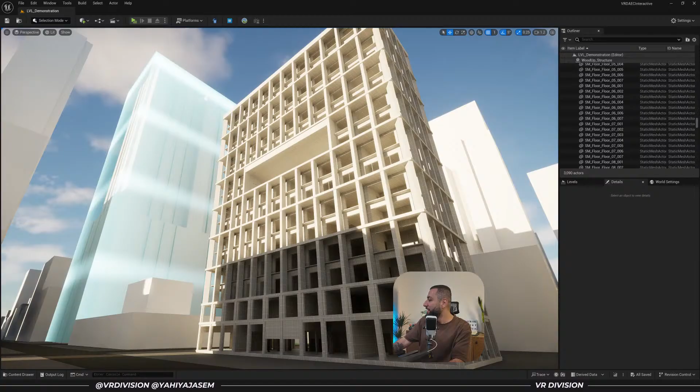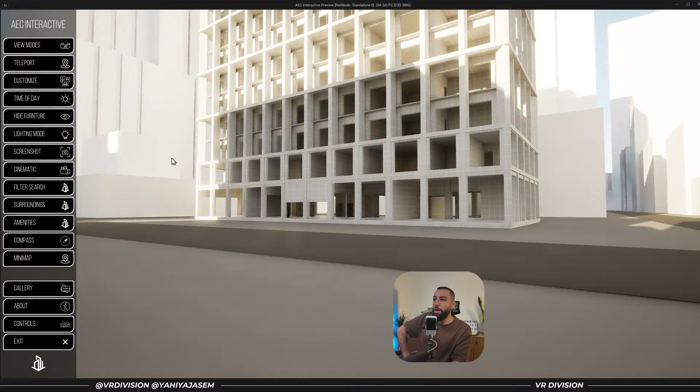Ranto asks, what version are you using? Here I'm using Unreal Engine 5.4. It's the version I started development with, the template that I'm building. I'm keeping things on 5.4 because updating is a simple click up, very easy to the upper versions, but if I develop on 5.5 or 5.6 or whatever, downgrading will be almost impossible. So yeah, I'm using 5.4. I downloaded 5.7, but I still didn't have the chance to check it out. Even 5.6, I've been busy this year focusing on blueprint and the development of my Unreal template. However, I will be making time for Twinmotion, the latest release, and Unreal Engine 5.7. There are some features I'm excited about, and I believe in upcoming streams we're gonna take a look together.

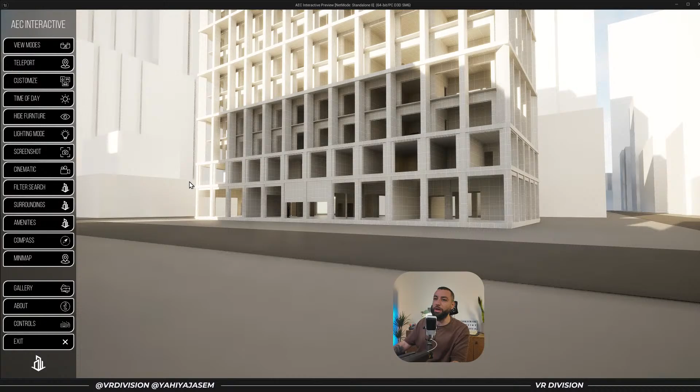I actually wanted to ask you guys, so let me ask this before I forget. Let me first find the Unreal channel. The question I have: would you be interested in live streams together where we watch the best of Unreal Engine, Orlando and Stockholm, or whatever events they are doing? Because they are making some really nice videos and I want to find time to watch some of them. For example, here, 'enhancing digital twins, scriptable tools and design workflows for crowds.' That's a very cool title, and there are some videos like this. So if you're interested, say yes in the chat, and in upcoming live streams we can collect some videos and watch them together and react together, see how it goes.

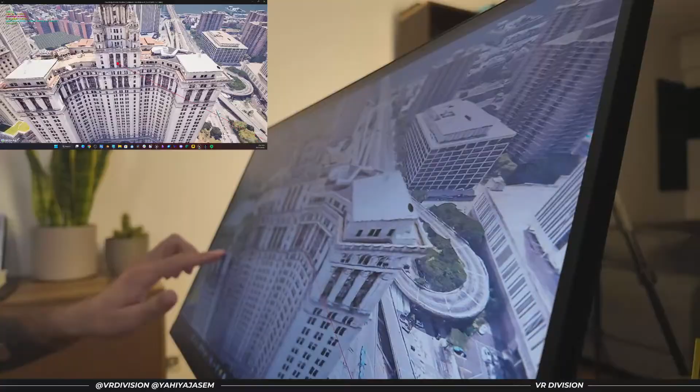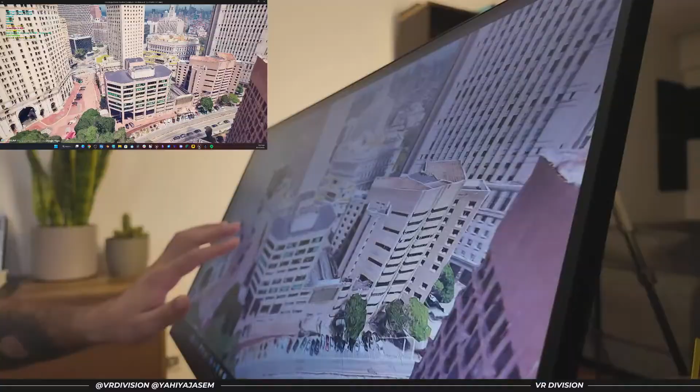So this is for the top-down camera, but I want to improve slightly more on the gesture recognition. Right now it's working fine, but sometimes, maybe 5% of the time or less or more, there are some little bugs I want to improve on or eliminate. I also want to integrate the system in drone mode and first person mode. I'm looking into that, and I'm hoping by the end of this month I will reach some solutions.

This system is work in progress, and it will be added to my Unreal Engine template to explore and interact with architectural projects once it's done. I'm pretty happy with the result. Basically that's what we call progress, a step-by-step process.

Let's say hello to you guys again. And let's do this perhaps.

Now this is one update, one of the parts. Like if you ask, hey, it's been a month, you've been busy, where are you? That's where I was. The second one, I don't know where to count, but there are a lot. So let me show you here.

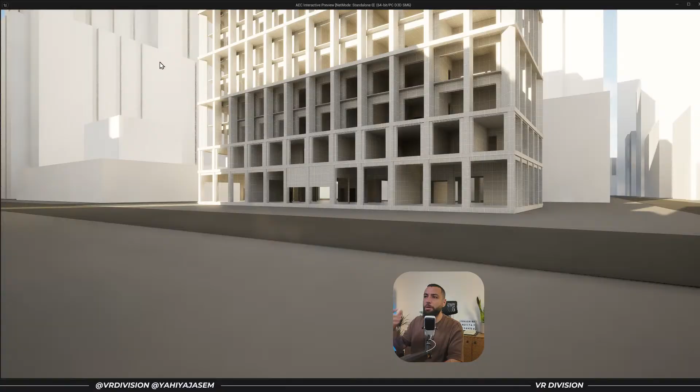If we click on play, I'll recount what I remember from my head. In the past we used to switch between views and it was snappy, but now there is some cool quick animation, as you can see now, like so. That is one of the things I've done, simple but nice for the user experience.

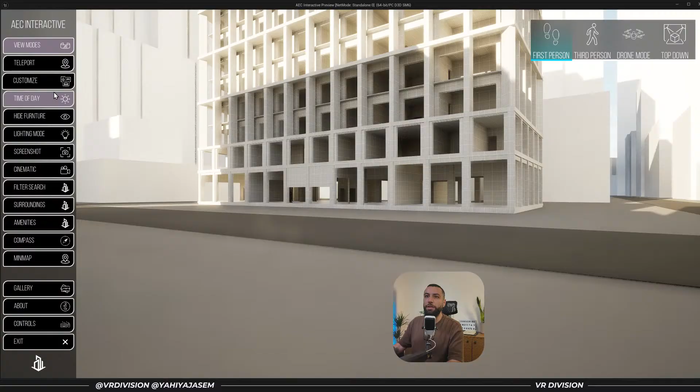Now I also did the following. Most of the work was actually on the systems here. In the past, if you click on filter search, it would eliminate other buttons like surroundings and amenities, blacking them out and disabling them. Now if you click on surroundings and amenities, I made them work together.

Let's say I want to move to surroundings. In the past we used to click and then click again, but now you can simply click. One thing I did: if I click here and then click on filter search, it will rotate the camera to the center of the project.

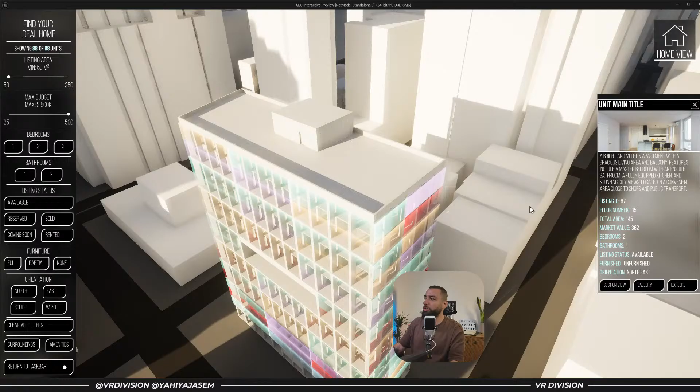This is nearly finished, but of course there is the section view. This is fine, and in addition to the section view, I've added the ability to explore. So now I can explore a unit, any unit I want to explore, like so. Once I'm done exploring, I can click on return, and that will take us back.

I can click here, click on section view, explore, and that will disable section view and allow us to explore. There were too many steps, too many things, but this specifically was requested by one of my students, and I'm happy to say we're done, we're nearly there.

In addition to that, there were different fixes here and there, but now we have smoother camera animation. It just works, and it's going well. So now let me disable this.

One thing I want to do, I think I have this planned for tomorrow. I want, when I click on surroundings, to have a special camera similar to when we click on filter search, which takes us to the center of the project. I want a specific camera that we can specify for surroundings. That's one update I'm working on.

Let's say I always want to be looking from this angle when I click on surroundings. You may have noticed when I click on the unit, let's say I'm going to explore this unit, I can explore it and whatnot. However, when I click on return and disable this mode, I will go back to that unit.

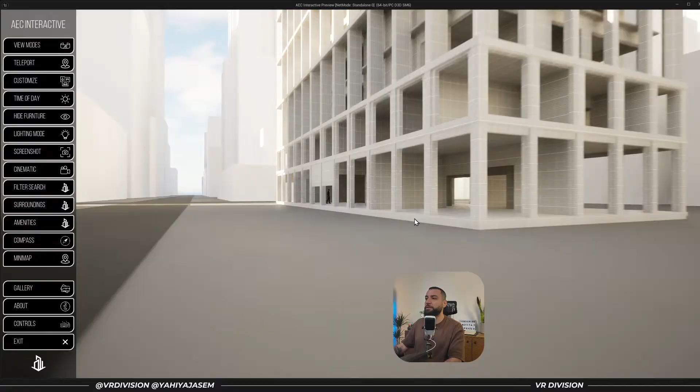So yeah, these are some updates I'm working on. There are very minor bugs, or not bugs, I'd call them user experience improvements that I'd like to fix as well. But we're nearly there. This is now almost one year of work, but it's getting there.

Here also the mini map, you can enable it with the M button. You can zoom in and out, and it will snap to the sides. It's nice, it's fine. You can change time of day, all these things.

So anyway, that's what's up, that's what I'm working on. I have my list of changes and things I'm working on for the versions. I'm using something called ClickUp instead of Trello. I used to use Trello a lot, but now I'm using ClickUp again.

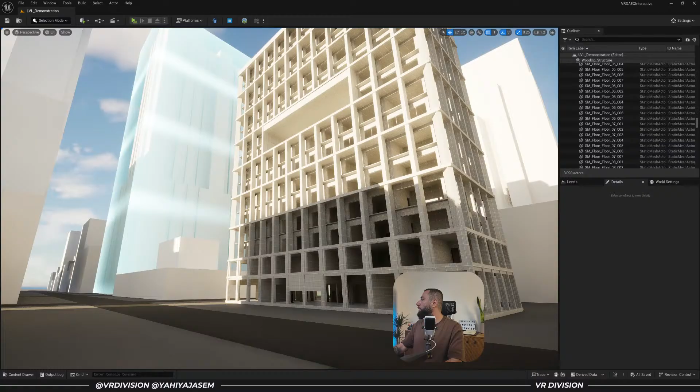And let's read the chat as well. So the poll is 100%. We're definitely going to find some nice videos that we can watch together. And I will announce this before, so we prepare our popcorn and start watching the lessons.

Okay, so Sai, Gravel, Tan, I hope you guys are doing great. Okay, let me read the chat real quick. Let me bring it to this other screen because it's easier, so I can also look at you. Let's do this.

I have a question: do you think architectural visualization has a future in the AI advancing time? Sai, I believe of course it has a future. Now, if we're talking about purely visualizing architecture, where we just create images and videos, it's going to get extremely competitive, and its future, from my perspective, is uncertain.

The architectural visualization field, as we've known it for the past 20 years, where you have a nice 2D CAD plan or BIM data and you want to create visualizations...

Slowly but surely this is somehow disappearing, and we will see, there are still the downsides of AI.

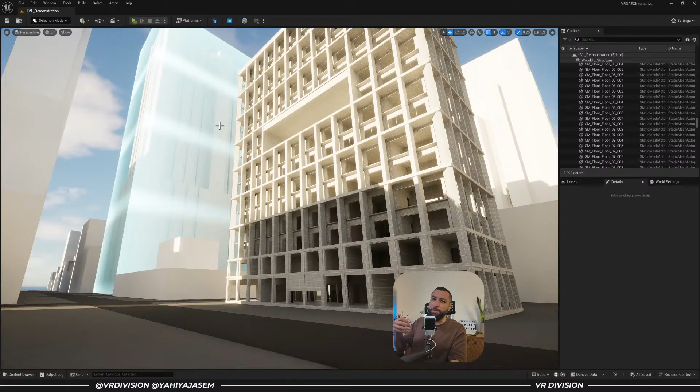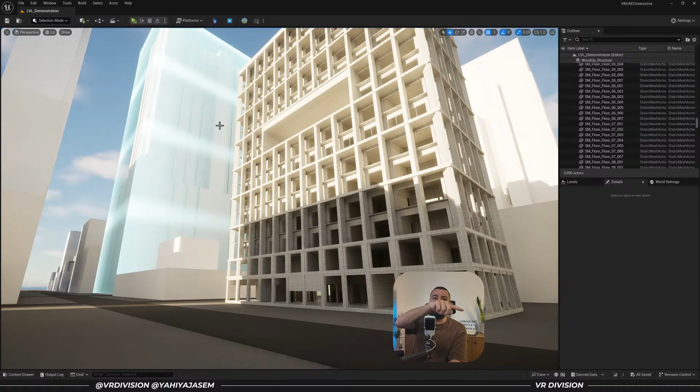Accuracy, consistency, and getting the same results is still not there, but also is still improving. However, I would not bet my future on just architectural visualization. For the past year, I've been focusing my studio on Blueprint and on digital twins, and on integration of Internet of Things, really doubling down on creating interactive experiences.

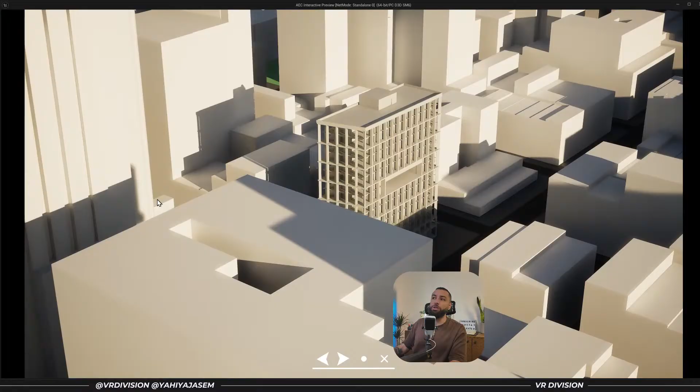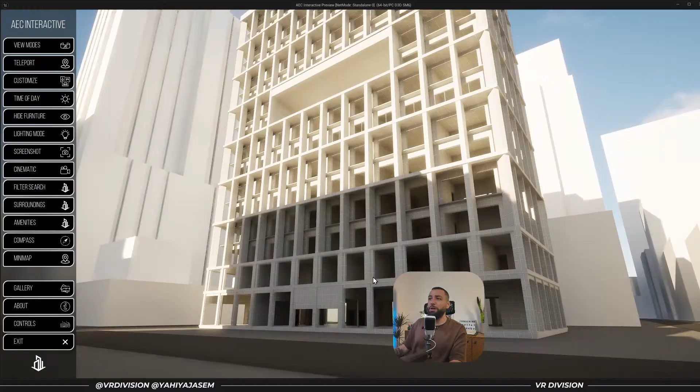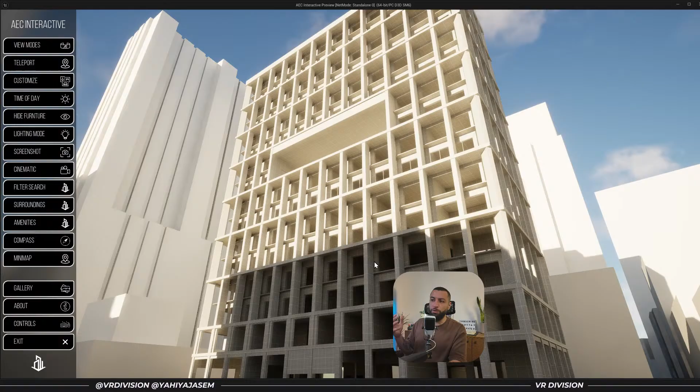So the touch inputs you saw, the template I've made here, and all these efforts are in order to improve on just the visualization of projects. If we're talking about just videos and images, the future here is uncertain, and it's getting cheaper and faster. So if you want to stand out, I still recommend learning Unreal Engine, and I would mix new skills with blueprints and helping the clients, depending on the type of clients, to really get to their goals. In the scenario of real estate, they want to sell faster, they want to provide better experiences. So Blueprint is one thing I would focus on, and creating or staging interactive experiences instead of just videos and photos is something I would definitely advise on.

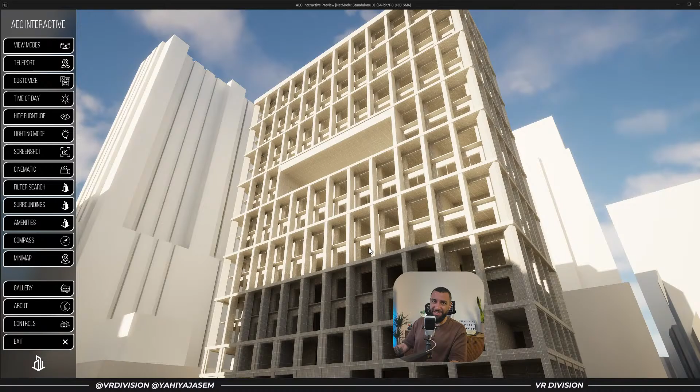That's the answer basically. And I would definitely not keep doing still images and videos. These are slowly going away to AI. As I said, there are areas where we need pure accuracy and consistency, where AI as of now cannot do it, and we will see how that goes in the future. But what's for certain now, maybe you've seen Google, I forgot its name, AI in a way is now able to create interactive worlds and whatnot, but I still feel like it's way far away.

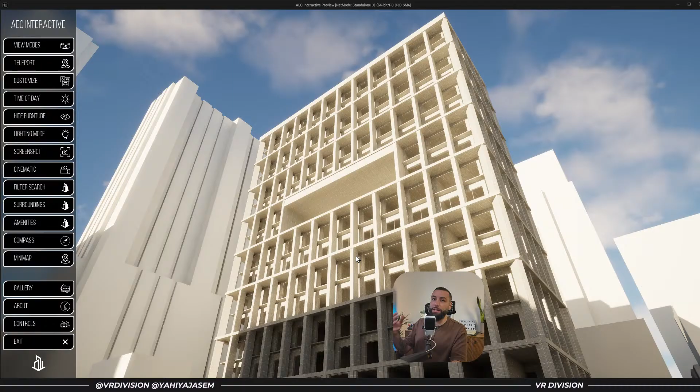So the answer: don't just focus on visualization, focus on more. Focus perhaps on interactivity or Internet of Things. There are still so many things to do in this area. One thing I see companies doing, which I also recommend, is creating interactive experiences. So you provide two solutions when you create your projects with Unreal. The first solution is pixel streamed experiences, and the second solution is where you render still images and videos to create web experiences that don't need pixel streaming, if you know what I mean.

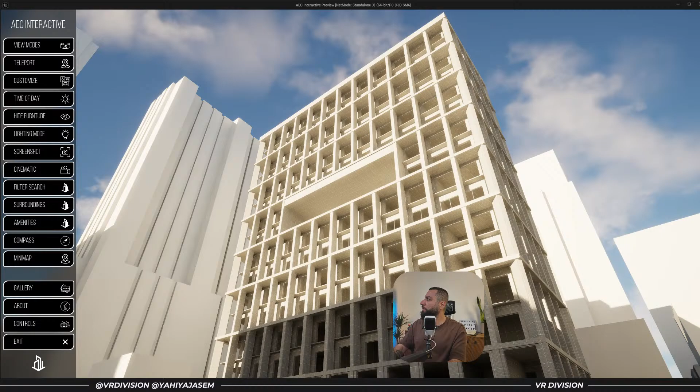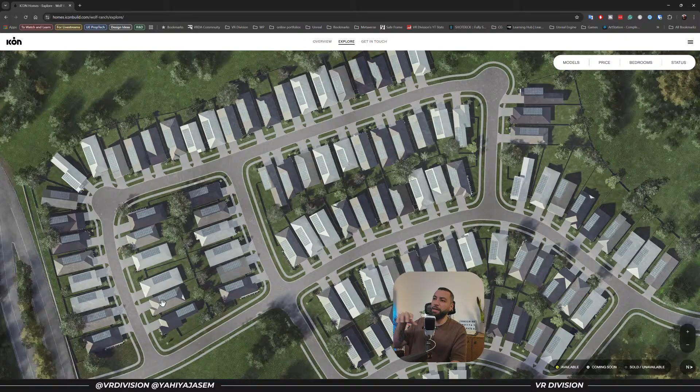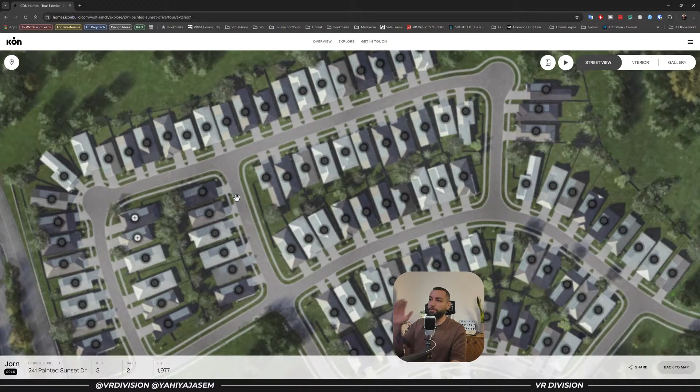So I don't know if I can find any... actually I can find. This is a project we worked on a couple of years ago. They didn't want to have pixel streaming, they wanted just to host the end result on the web, like this, as you can see here. So we rendered thousands of images and hundreds of videos to create what I'm going to show you now. So this is 100 homes, there were a lot, and automation in between.

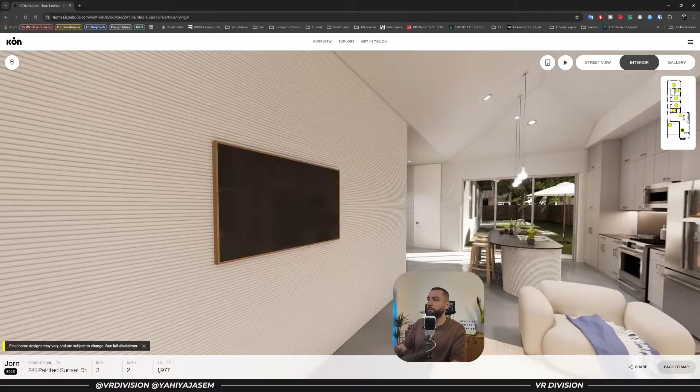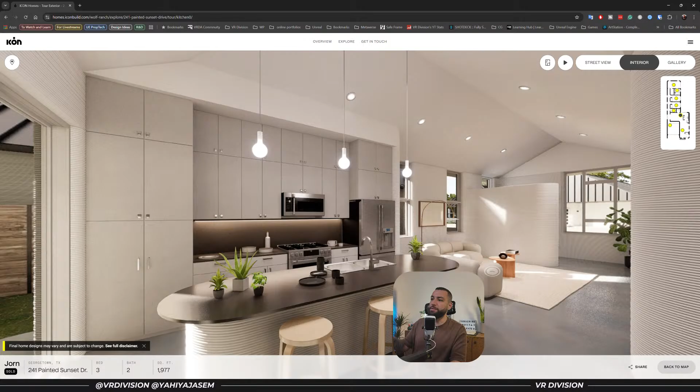We have this, every time you click, you have this video going through the units, the houses, and when you reach the destination, we have a 360 render, as you can see here. And if I want to move to the next hotspot, I click on it, give it a second to move. There is a video, it didn't work for some reason, but you can imagine. I think they removed the videos, but there were videos between every hotspot, back and forth. So now it's a quick, simple teleportation. This is what I call the light experience.

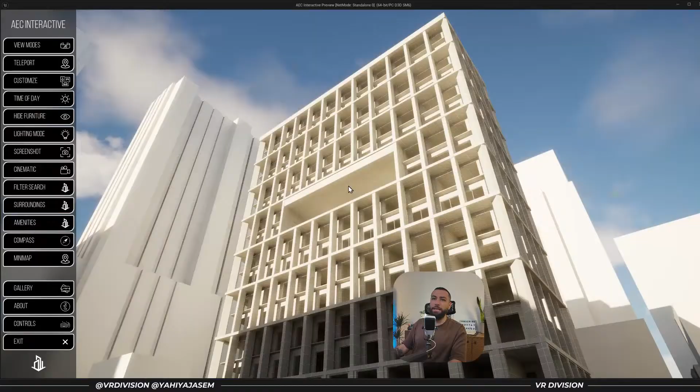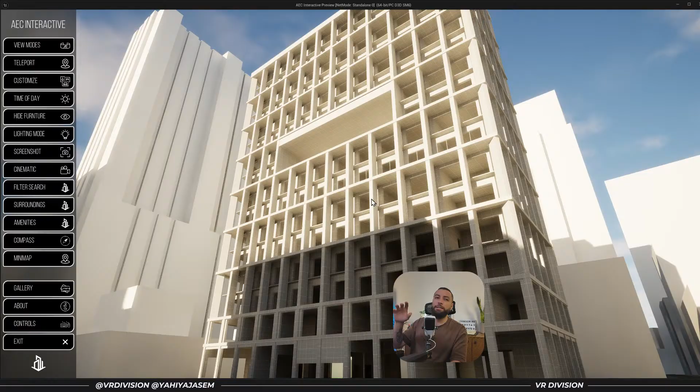So Unreal Engine allows you to do both, and that will definitely help against AI in general. Something I want to focus on in the future, also something very important, is that when we design our experiences, touch screen is extremely important, as I just said. And the iPad or tablets as a control device is also very important. So when we design these experiences, we should not give the clients mouse and keyboard, we should give them more than that. And that will also allow you to choose the right type of clients you want to work on, that can allow your studio to grow, and so on.

I hope this makes sense. I know it's such a long answer, but that's how I see things right now, Sai.

It's been a while since I last used Unreal Engine after finishing my studies. Now that I'm working in an architectural firm, I mainly use Twinmotion since it's much simpler for architectural visualizations.

Yes, Twinmotion is amazing, and the new additions by Epic, the updates they're doing are amazing. Now we have Nanite as well in Twinmotion. We have the configurators in Twinmotion. We have the cloud presentation in Twinmotion. So Twinmotion is amazing, Gravel.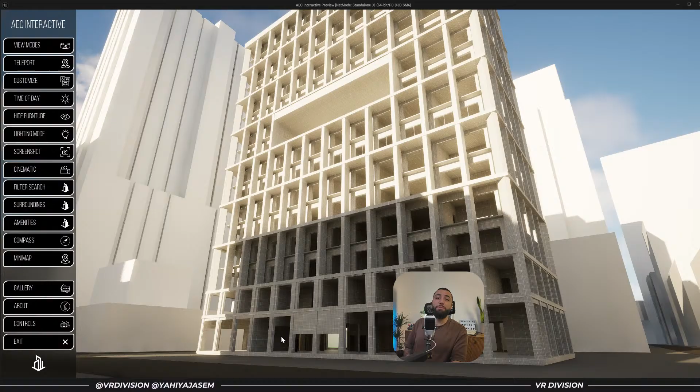I also advise, just for fun, using Twinmotion outside of architecture for product visualization, for automotive visualization or configurators, because you can do that for sure, and it will allow you to expand your skills. Twinmotion is built on top of Unreal, so when people ask me why should I learn Blueprint in Unreal or programming in Unreal, I tell them because you can make something like Twinmotion.

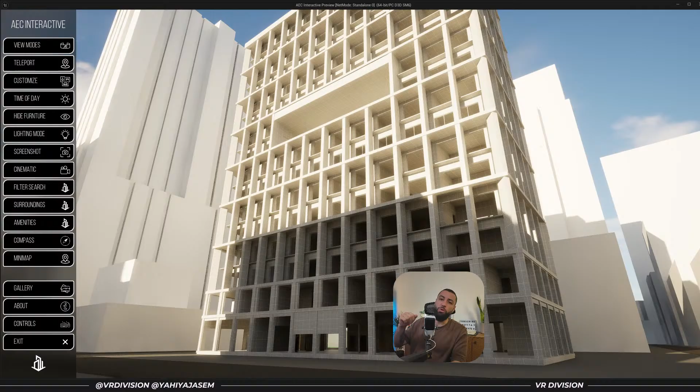So if you're using Twinmotion, you are on the right path, and transferring skills won't be as hard. One of the videos I've uploaded a couple of months ago is the pipeline from the 3D tool of choice, whether it's Revit or 3ds Max or even Blender, to Twinmotion, and from Twinmotion to Unreal Engine. This is for me the perfect workflow, especially for tools like Blender where we don't have official support for Datasmith.

So I would export the project to Twinmotion, set the scene up in Twinmotion, the revisions, whatever it is, all in Twinmotion, and when we get approval, everything is good, we would export from Twinmotion to Unreal.

Part of me is looking at the camera, but I think it's fine. Let me just double check. Yeah, this feels more straight.

I'd love to know what unique advantages does Unreal Engine 5 offer for architectural visualizations compared to Twinmotion. Gravel, as a start, is what I showed you here. You have full control over what you create in terms of visualizing architecture.

When you're talking just visualizing architecture, if you're talking path tracing, lumen, just to take photos and videos and presentations, I think they are identical. But the moment we start thinking, okay, we have a client who needs custom solutions, then that's where Unreal Engine comes in, because you can build in Unreal Engine whatever you can think of.

Whatever you can think of. You can even program your phone to be the controlling device of the experience, for example. So that's the main difference.

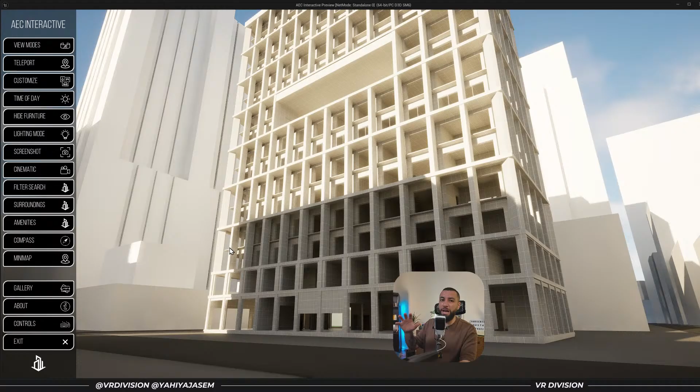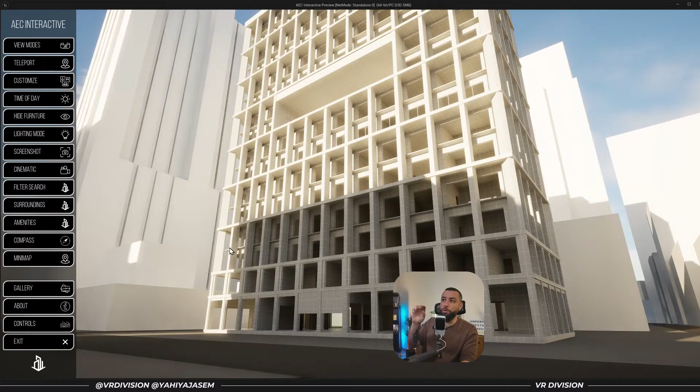If you're using Twinmotion or Unreal just for still pictures, for rendering videos, for just presentations, I would do it in Twinmotion because it's fast. But once we start talking scalability, or we want to provide an interactive experience with the client logo or with no Twinmotion logo and whatnot, then Unreal Engine for sure.

As I said earlier, the full customization and creative or technical freedom, Unreal Engine is the way. I hope this gives the right idea or the correct answer about your question, Gravel. What do you think?

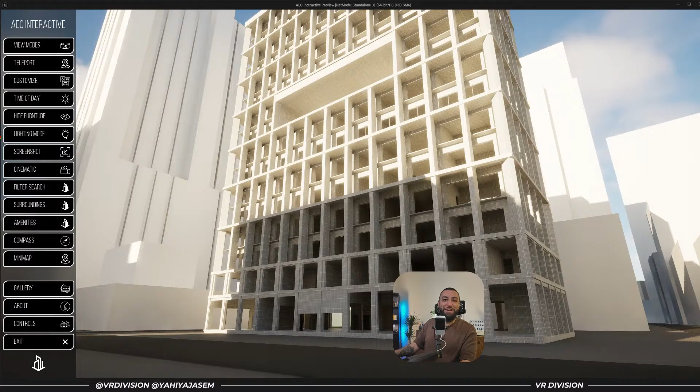Tan, did you implement the window resize function? I remember you from Facebook. No, not yet. It's something I plan on doing when I click on.

Let me click here, for example. Something I'd like to do is to add another button to show the floor plans of each unit. Right now, I don't have that button, but imagine once I do that, I'd like, even for photos as well, to be able to resize these windows.

Is that what you're talking about? The ability to resize images or panels like we have here? Or are you talking about this teleportation panel? You want to be able to click on the corner or whatever and then resize this? Because in my mind, I think resizing floor plans and pictures would be extremely cool, like so. Tell me, Tan, what's on your mind?

So deep linking to link my other projects in this, for example, panorama views for external page. That would be interesting. Deep linking, panorama views from external page. We'll take it step by step, okay?

And what I imagine is it's possible, it just needs time. I have a long feature list, more than 50 features and requests, and I will take them one by one.

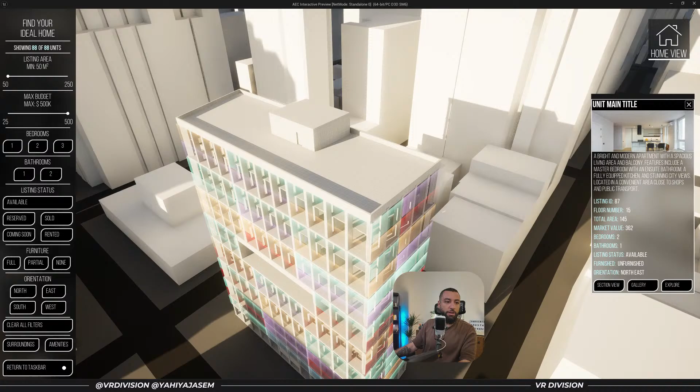Sai, my pleasure man. I'd like to know how you learn about blueprints, and is there any free resources to learn blueprints and Unreal? I am a student, that's why I'd love to know about your journey. So that's a great question.

Now when I first started, like 2 years... first of all, I've been using Unreal for the past more than 10 years, and that's a lot of accumulated experience. In these 10 years I've opened many projects, reverse engineered many projects, and I think I've seen hundreds, if not thousands, of tutorials on Unreal and Blueprint and many things in general. Now, free resources, there is just YouTube, and I don't think there are any other or better video platform than YouTube.

So here's what I recommend, Sai. Download projects from the marketplace, open them, see how they are made, that's one. But if you're a complete beginner, you need to start with the very basics of Blueprint, and on that, YouTube is full with the fundamentals. One resource: I have some Blueprint lessons on the very basics you can find on my channel, and there's a new playlist I'm working on, a new course if you will, about user interface design.

So you don't go crazy like this guy here is doing. There's a new video coming tomorrow, and another one coming next week. I think this little course will be like 5 or 6 videos on user interface design on UMG. So our channel is one resource, and the internet, YouTube in general, is a whole big resource.

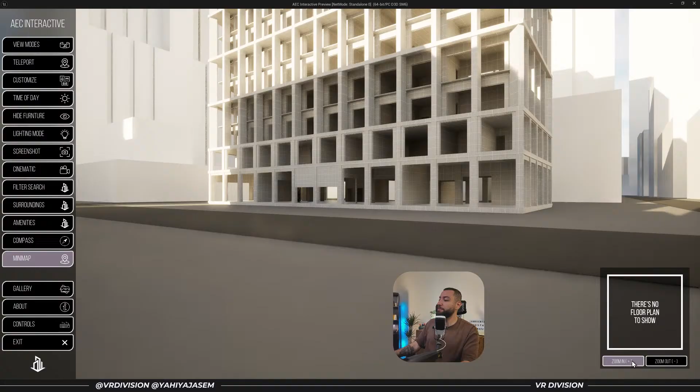The touch inputs took me about 5 weeks. The minimap system, this took me 6 weeks. This system here took me 6 weeks, bruh, with all the tools I sent you, and there's no such minimap system on the internet that will teach you what I'm doing here. So you need to figure things out on your own, which is fine, which is nice actually, because once you start grasping the basics and taking it step by step, you will be able to imagine systems and tools, and build them step by step.

So that's my recommendation, Sai. My pleasure, Gravel, I'm glad you like the answer, my man.

And Tan, for example, a teleportation table or window that shows deep linking videos linked to a YouTube video - that's totally doable, Tan. I will look into the website you sent me and add some of its features to the list I have, and we will see from where we take it from there.

Mano, it's gonna be a pleasure, Mano. Thank you.

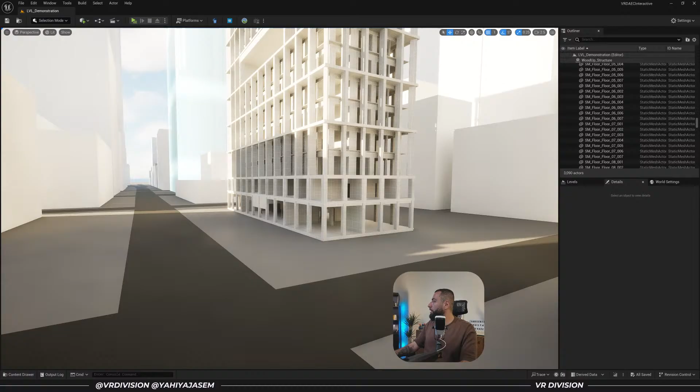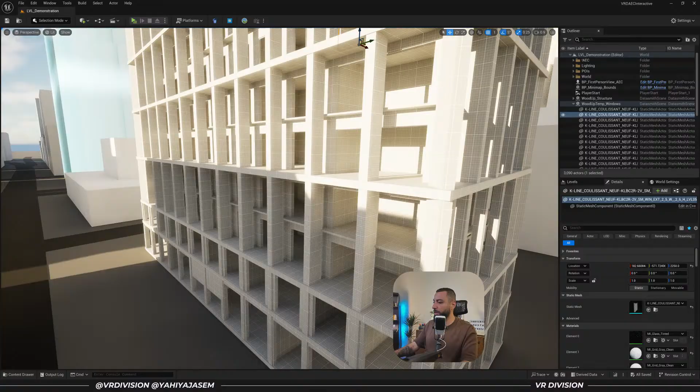Okay, now I wanted to export the windows from 3ds Max to Unreal, so let's take care of that, and I will leave some time for some questions, and after that I will stop the stream. So if you guys have any questions, now is the best time.

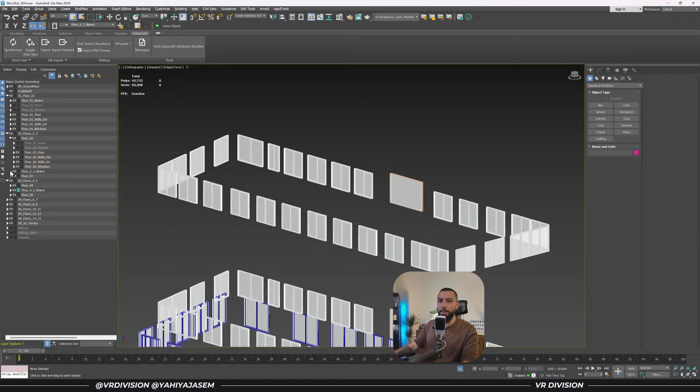So let me unhide the windows so we can send them. I think I should put all of them. That's the thing about organizing layers. Should you put things in layers like this where every floor has its own elements, or should we add everything in one layer and take it from there? For example, all the windows can be in one layer, all the floors can be in one layer, or things should be in specific layers like I have here.

That's always the question. I wish we could do both, like have two-layer views, for example. That would be fine.

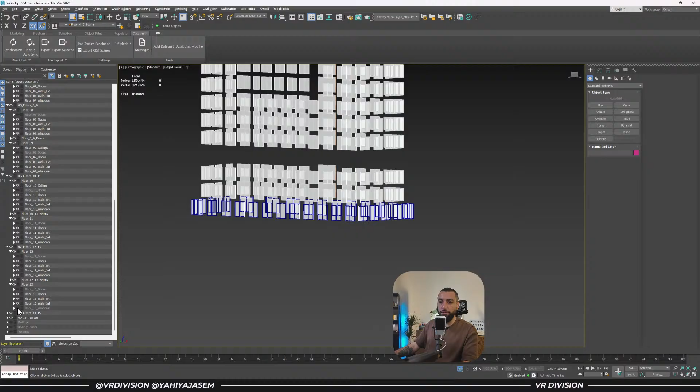So here we have a floor that I forgot its name. And let's see.

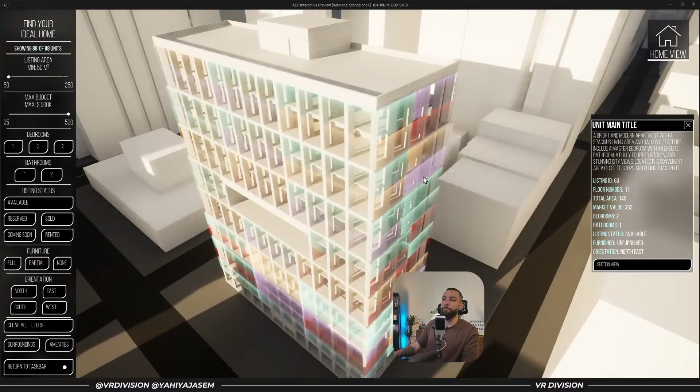So I'm going to either get the Google Sheets to Unreal Engine plugin, or maybe we're gonna make our own plugin or simple solution to connect Google Sheets to Unreal Engine. So we will see how that is going to work and how can we do it. Once we finalize some of these major requests, we will look into the minimap and other things. So step by step.

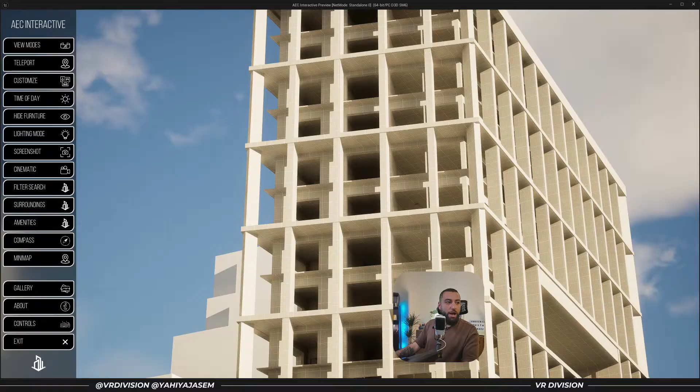I wanted to know, is there a way when selecting a special unit, you click on it to go to that unit and hide all above floors so you can focus on the selected unit, you look at it. Oops, what did I do? I clicked something twice.

Thiago, I believe if you are thinking about or asking is the section view. So you want to know if there is a way when selecting a special unit, you click on it to go to that unit and hide all the floors above it, so you can focus.

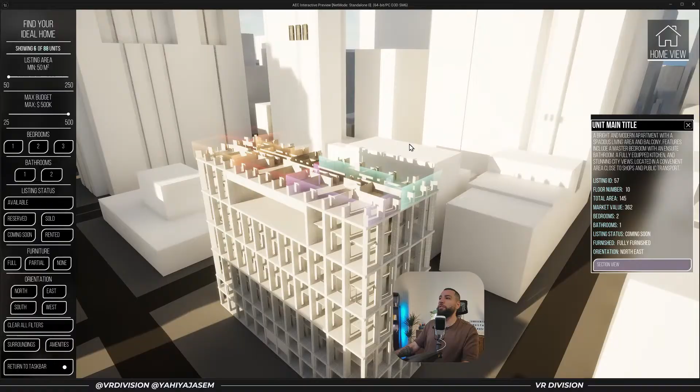Yes, so section view, when you click on it, it will hide all the floors from above, and that would allow us to look into the units like this. So if I click on it again, it will bring things back. This actor here basically is what's hiding the units, and you can click on any of these to switch between units, like to get closer to it.

I hope this answers your question.

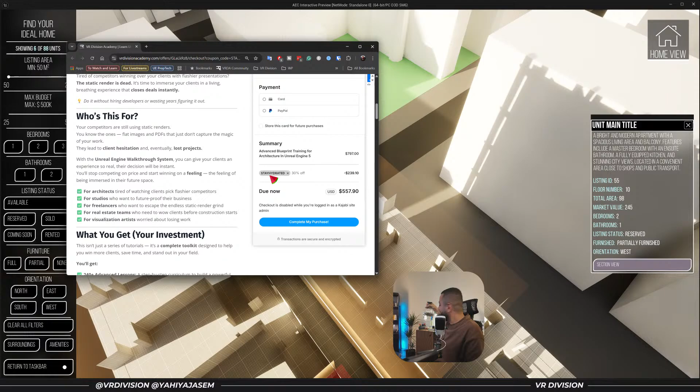Water is good. Actually today I made a video and added a water meme, let me show you. Spoiler alert for tomorrow. So where is the water? Once I saw a comment on Facebook, someone asking about a tutorial, and the answer was go watch the Stay Hydrated guy. I was like, holy shit, that's amazing.

RDiva asks: the apartments have their number in engine, it has invisible boxes. What's needed for intersections? Some buildings have hundreds of apartments, how do you deal with it? I need to read this again, I didn't really understand. RDiva, can you ask your question again?

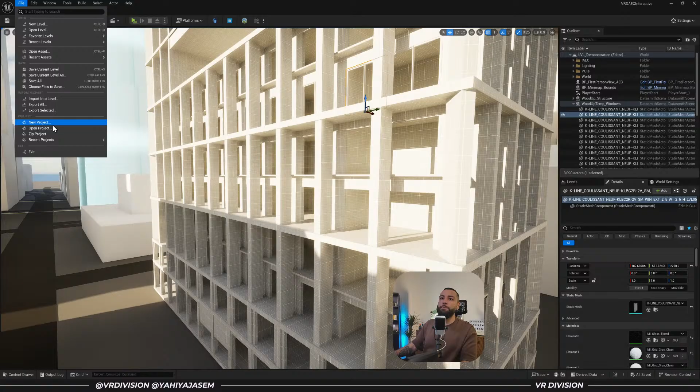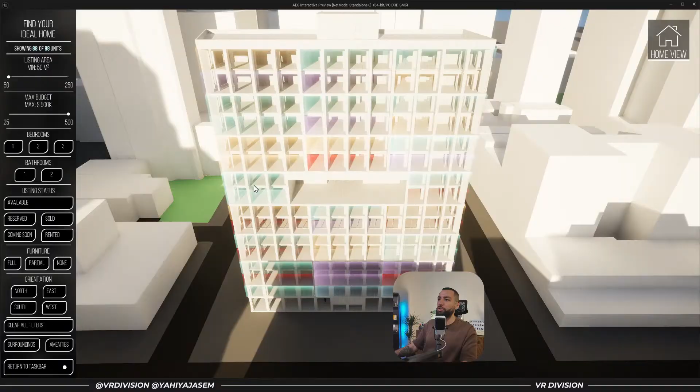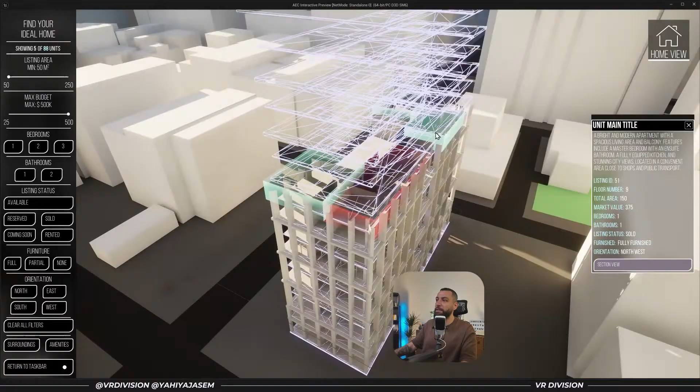In engine there are invisible boxes. I'm not sure if I understood, but something about my project in Unreal Engine. For example here, if we type Alt-C, you can see the collision. If this is what you're talking about, when we have many objects we can see the collision. Let's go to filter search, click section view, and type show collision. As you can see there are the floor collisions, and later there will also be wall collisions. So if you're asking how I can select these, how the mouse is not colliding with the floor and how I'm able to select these units, that's because there is something I implemented a couple days ago, which is a tracing channel.

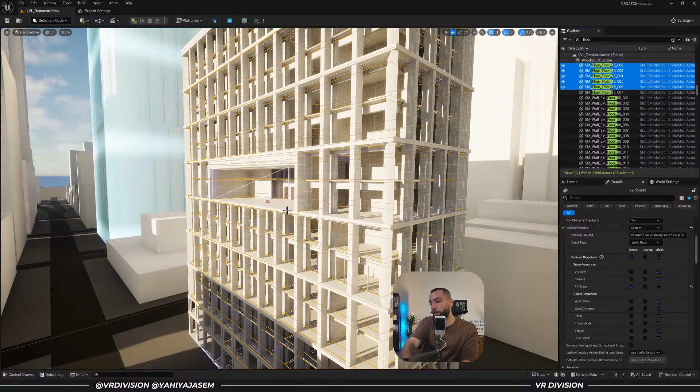A special collision channel basically, which can be found under collision. I added a new trace channel called POI trace. What I did on the meshes, on the floor meshes, this takes some setup, and this is why I say it's extremely important to keep our projects organized and named for ease of selection. So I selected all the floors in this scenario. Let me show you real quick what I mean. I type floor, it shows me the floors, select them, then go to collision, and under the collision presets it would be set to custom, and we want to click ignore POI trace. This way I can select the unit boxes, to be able to teleport or select, I'm losing my English here. Let me stay hydrated.

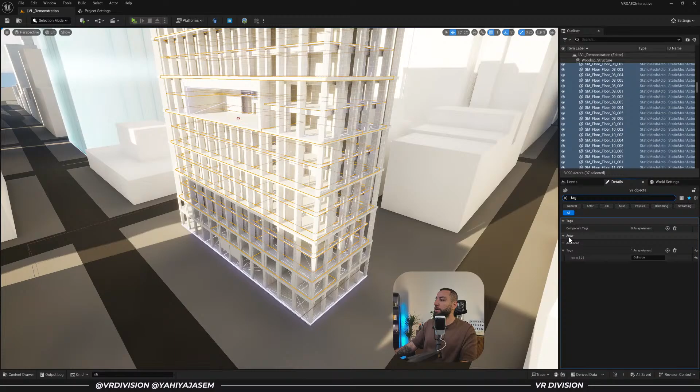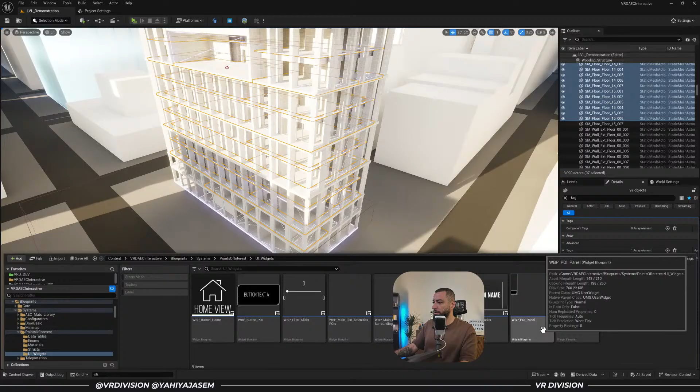Okay, to be able to select the points of interest. English is back. So this takes some setup. Now this can be done either from the collision response, or if you have hundreds or thousands of objects, you can select these objects and set the tags of an object. So I was doing a test to get all actors of class with tag. That's possible, but I dislike getting all actors of class with tag. So if I show you how that looks, I added it as an option. If I open the blueprint here, we have it. If we don't want to use POI trace, I left these two options where you can get all actors of class with tag, and select the class to be a static mesh. Then you select the tag of the mesh. In this case, as a test, I made it like a collision, and then I would set the collision to be enabled or disabled, and that looks like this here, so no collision or collision enabled query and physics. So there is this as a solution, or setting up the POI trace on the collision channel here, POI trace.

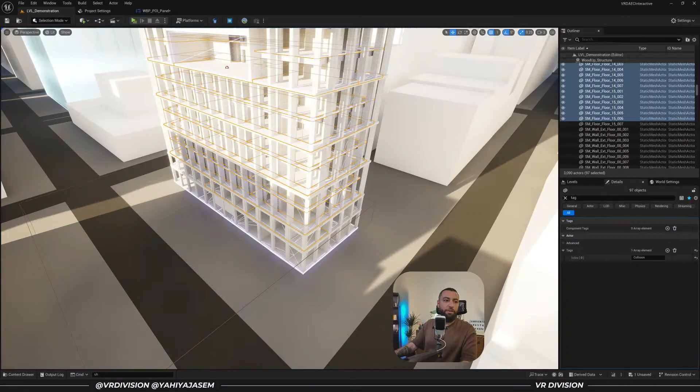I hope this answers your question, Ardiva. If not, I'm gonna keep reading the chat. If you can explain to me better, that would be immensely helpful.

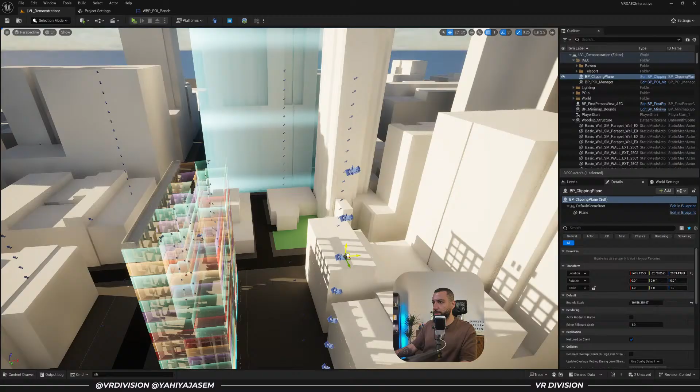I'm not sure I understood actually, Tan, but I can show you something here. I don't know if this is what you mean. So do you see this actor I have? This actor basically splits meshes like this. This is the sector, like the section view, and you can make it work on any mesh as long as you add the correct material function on the mesh's material, and it just works. Is this close to what you're asking, or is it far?

Okay Sai, how can I use PDF files in Unreal Engine? I was trying to create a product interactive catalog for chemical products.

That's an interesting question, I'm not sure you can actually, but what you can do is create a user interface with a little catalog or gallery view. So for example, if we quickly create a widget blueprint here, let's add, well not a canvas panel, let's add a border, or let's actually start with... I forgot its name, guys. Overlay, let's start with an overlay.

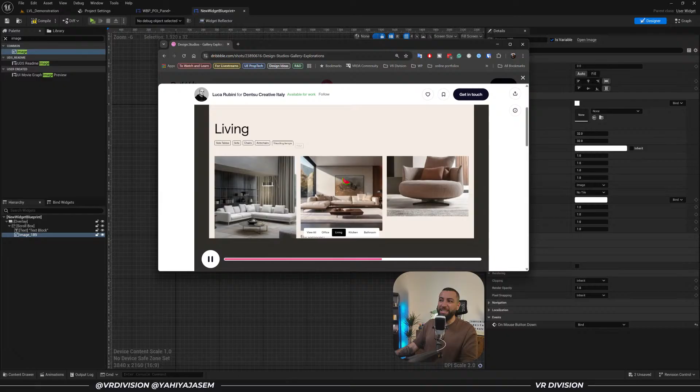Sometimes for fun, I open Dribbble and similar websites and search for pages for inspiration, and I practice like this. I plan on doing such user interfaces in Unreal Engine soon once I finish my template, because this is, from my perspective, next level interactivity to bring things to nice interactions. So I highly recommend looking at UMG and user interface tutorials, Sai, and I think you can do it. But I've never imported a PDF file in Unreal.

I'm not even sure we can do that. If we can, that would be interesting. But what you can do is import images and scroll down, or add something similar to the gallery system we have here. If we click on gallery, we have these, so imagine like your PDF pages, each one is like a page like this. That's maybe possible too, it might work. Here we have a text, the image, and the exit button. So yeah.

Gurbal, cool, no worries. Hotspots will be a good feature as well. Hell yeah.

They can see the instruction and details about the product. Yeah, you can recreate the PDF file inside Unreal.

RDVA, I mean, it would need separate blueprints for each box with an info box, infinite time of work, for each, and scripting. Okay, now I understand what you mean. So, let me understand - you'd need separate blueprints for each box with link, info, and so on. I think here you need to increase your experience with blueprint. There are things I learned that I never knew in the past. If I look at my Unreal projects with blueprint 5-6 years ago, I used to turn every actor into a blueprint.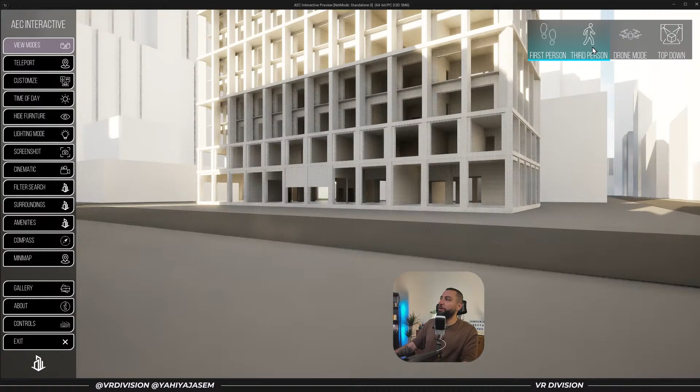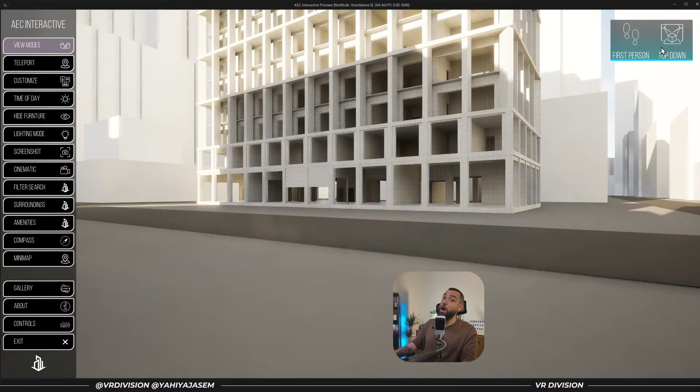I can demonstrate. So let's say right now, if we click on play and click on view modes, we see first person mode, third person mode, drone mode, top down. Let's say we don't want the third person character, this guy, and the drone mode. So when you set up your project, let me select the drone and select Mr. Cooper and delete them. I click on play now and click here, and as you can see, they are dynamically gone. So that's one, and there are many elements like this.

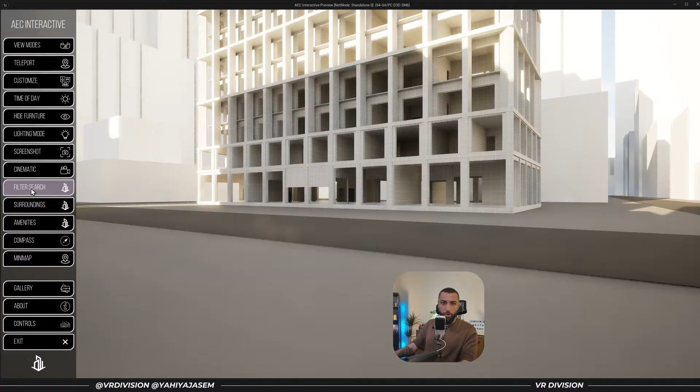So I'm gonna show you as well. When I click on play in this level, we have the filter search, okay? Because we have apartments, we have units. In the gallery level, we don't have a building, we don't have any unit. So here, we don't have these, we don't have units, okay? So when I click on play and click on the taskbar, as you can see, the filter search is gone.

And let's say there are no amenities in the level. So here we have 2 amenities. Let me select both and delete. Click on play, click. The amenities button is gone. So in a way, I do that for you, so you don't need to delete buttons and whatnot.

And I want to do it on other actors. So right now, the cinematic, I need to implement it. The screenshot, yes, we need to do what you just said, because there is no way to remove this unless you disable it. And I want to find easy ways to disable actors.

So let's say if I want to remove the sun and sky, let me delete it, click on play. We don't have the ability to customize the time of day anymore. So let's bring the sun and sky again, click, and now we have the ability to change the time of day. So yeah, I'm trying my best to improve the user experience for us the developers, and for our clients, where we keep only what we care about.

Gurbal, my pleasure, man. It's all on the list.